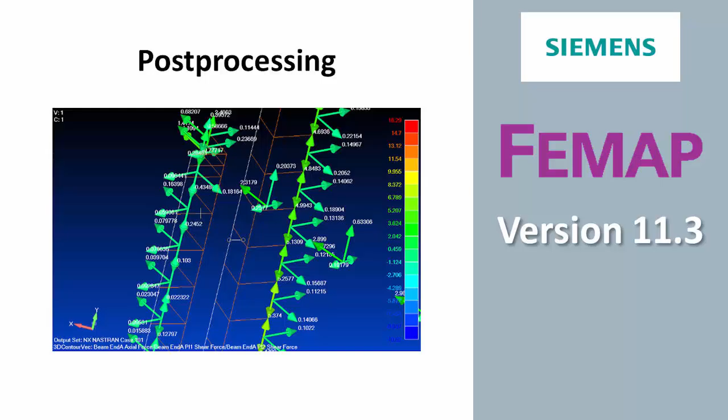Post-processing: we did a complete overhaul of what we used to call contour vector plots, which was confusing since we already had contour plots and data output vectors that really didn't have anything to do with each other. We're making arrows, so we now call them arrow plots.

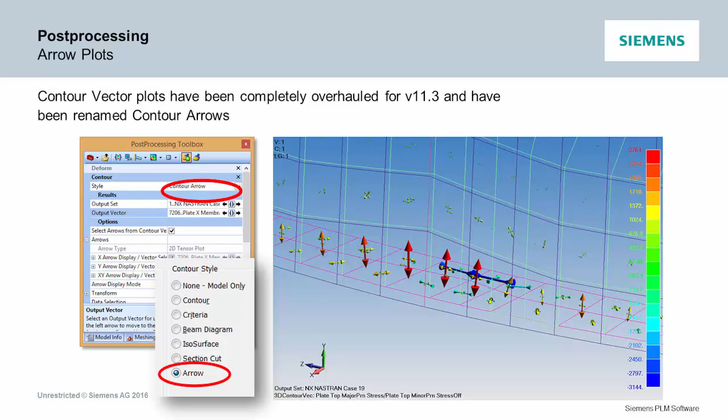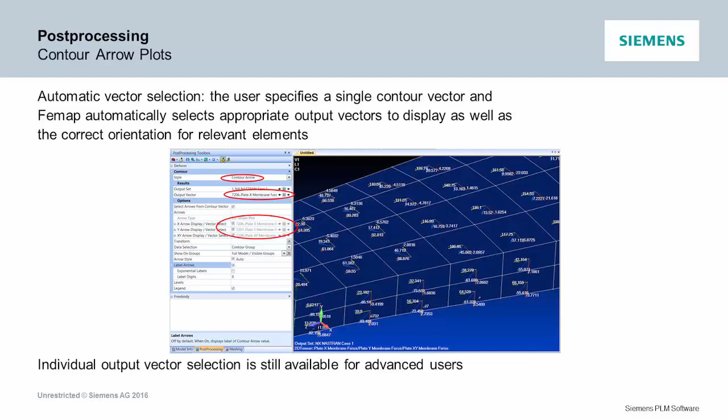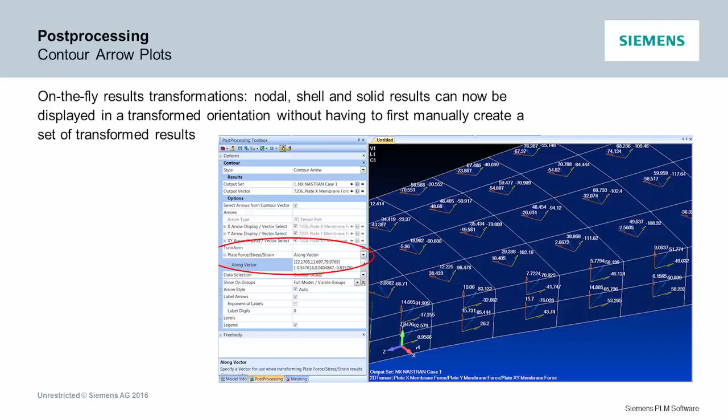We set this up so that when you pick something like membrane forces, picking X, Y, or shear automatically retrieves the other components and plots them all at once. You don't have to worry about it. If you then press the transform button, it just transforms them without you setting up a bunch of stuff. It's so easy now to make a force plot, transform it in any coordinate system, and see it on screen. It changes the arrows to something that makes sense.

It does the same thing if you're plotting principal stresses. It automatically switches to center arrows, shows tension and compression, and you can see what direction they are. If you pick major stresses, it automatically picks the minor stress too. But if you want to turn one of them off, you just turn it off and you'll see only the one.

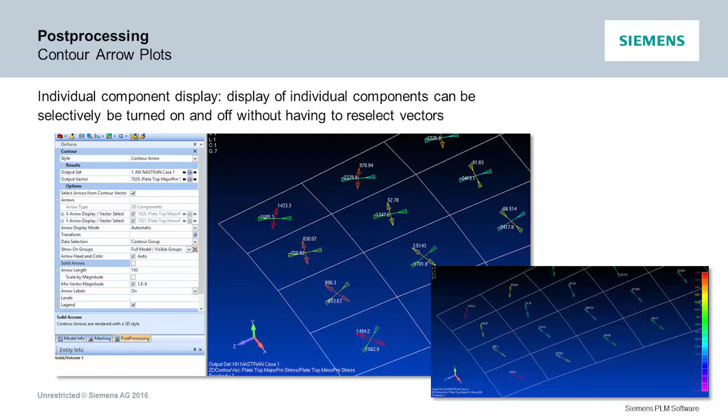There's also solid arrows if you want it to look pretty and nice, but those are optional, and they do look pretty nice. It kind of demos better than it shows here.

Let's do some beam examples real quick. I'm going to shut off everything but my beam elements in this model. This model has stiffeners running vertically, though you can barely see them, and fasteners running this way.

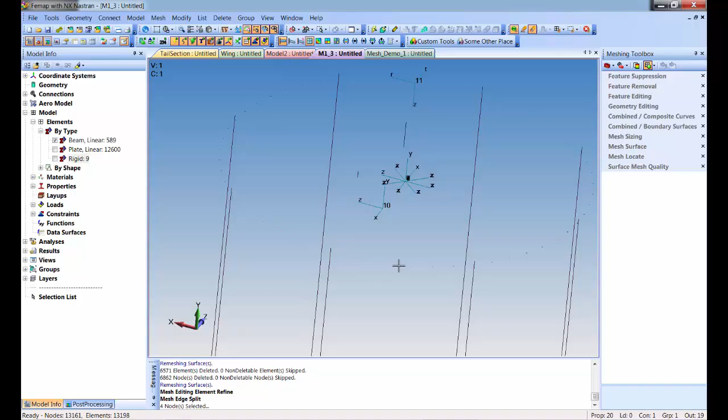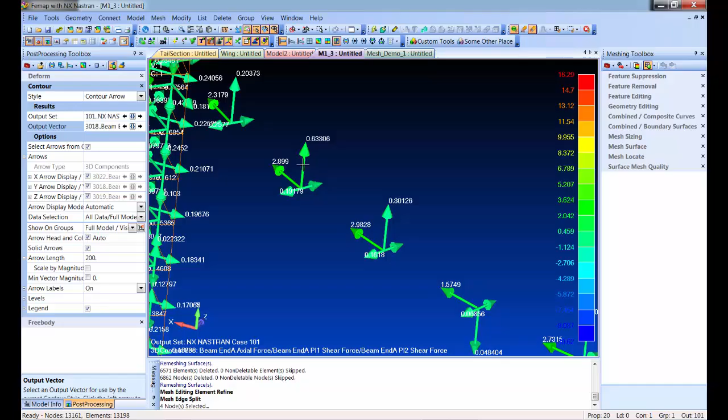So if I go into the arrow plot and pick shear force on a beam, it automatically draws all my beams. You'll see tension on that little fastener, here's its shear components, and the bigger one shows the same thing, tension and shear.

Another nice thing you can do here: I know that shear is YZ, and I can combine those at the same time into their total shear without having to do any output calculations.

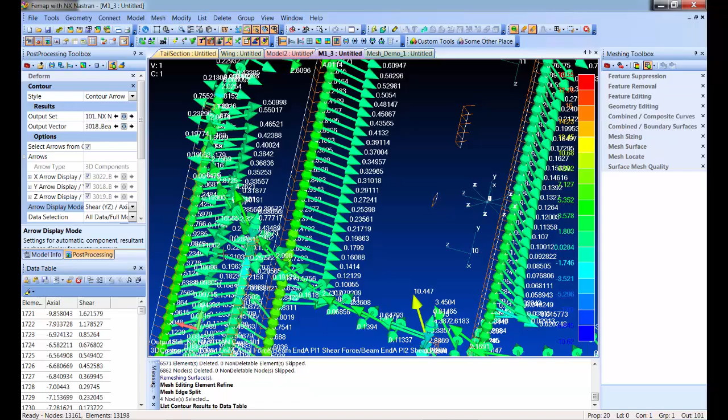Just like everything else in Femap, I'm going to turn on my data table and say list output contoured results to the data table, and now I can sort. If I turn on the highlighter and highlight something, it'll show me the highest axial stress or axial force in the model in this case.

Or if I change this to shear, I can find the highest shear value right here on this element. It shows me the element ID, and I can see the max shear. I can quickly tell what's the highest shear load in a fastener in this entire model.

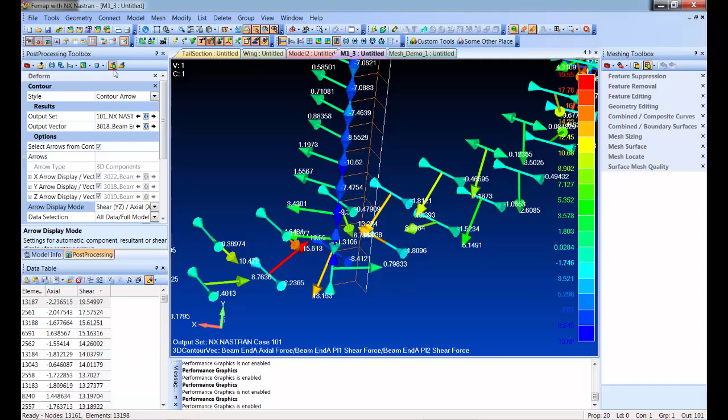I'm running in performance graphics right now, which is a little better because it can draw the symbols and the little arrows faster. That's all taken care of. A lot of things that we can't draw in performance graphics now internally fall through and draw with the old graphics, so you can pretty much stay in performance graphics all the time.

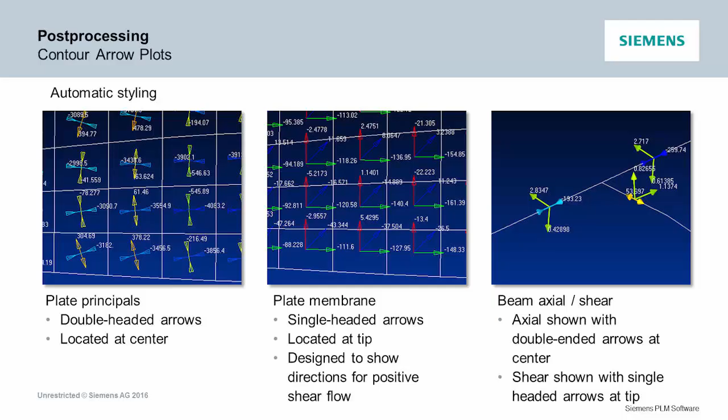You saw this work for beams, but it also works for bushings. So if you've got a bunch of CBUSH elements, you can now see the forces in the CBUSH at the same time. Even simple displacements draw with these new arrows, and then you can transform or do whatever you want, and use the listings, sorting, and all that.

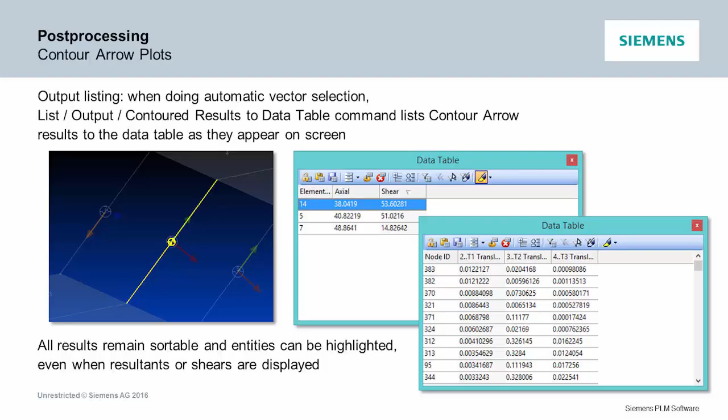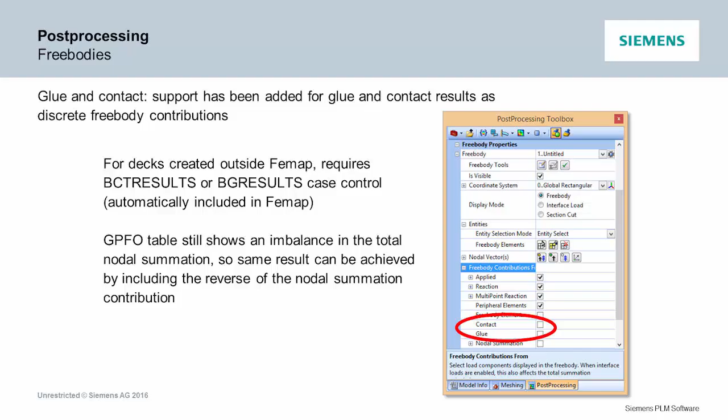Some free body enhancements: in Nastran there's been issues over the years where glue forces were backwards in the grid point force balance. Femap took care of it, recognizing it as backwards and flipping it so things were balanced. They've since fixed some of those, so now you don't need to turn them on and off and do any flipping. Things are squared up on free bodies.

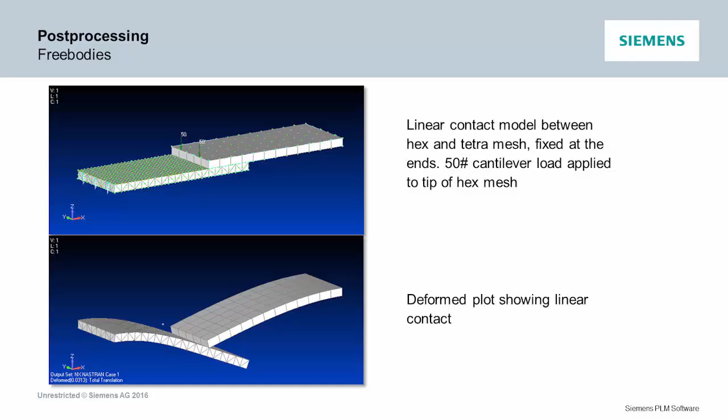Just with linear contact now, you get all the free body stuff in the Nastran results file, and you can see total forces across joints and whatever you want to do with free bodies.

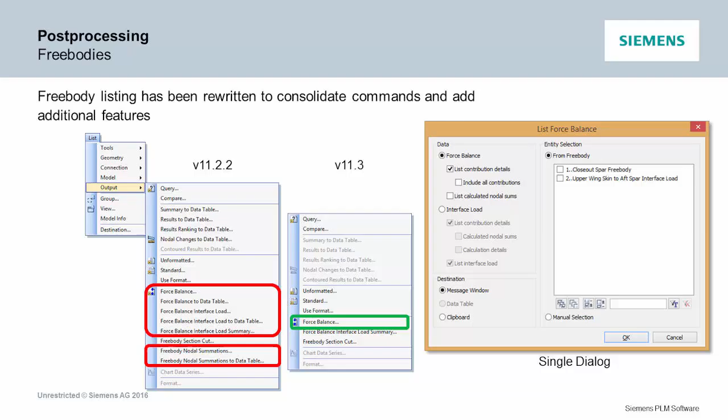Some new listing options: we've consolidated what used to be all these different commands into one nice box. You can just list your free body data much easier, and besides the window, it can automatically send it to the clipboard or the data table, which is nice when you're messing with free body forces.

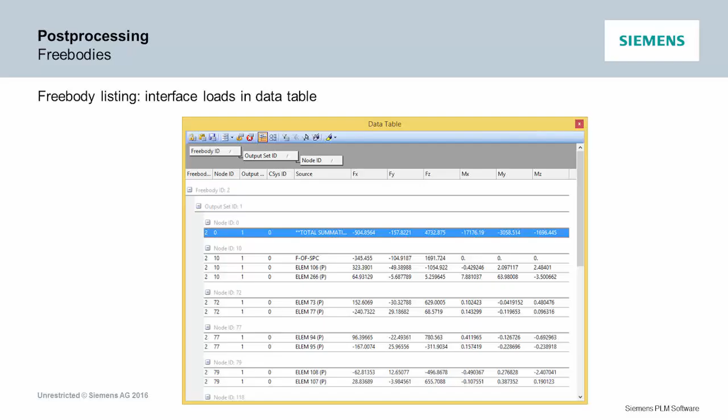The listing, when going to the data table, actually mimics the F06 file. So if anyone is used to looking at the Nastran printed results for free body information or grid point force balance, Femap will now spit out the same thing so you can cut and paste it.

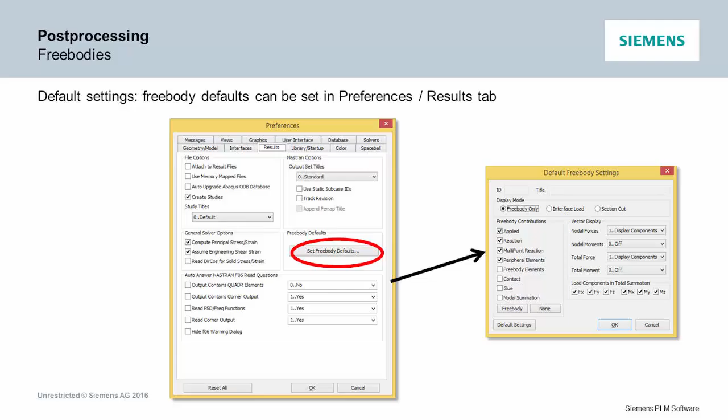For free bodies, there are some options when you set up any new free body. The defaults are usually right for just making a free body, but if you do something special, you can now set the default so each time you create a free body, it gets the settings you want.

A small usability enhancement: we've got charting in Femap, completely rewritten in 11.2. It's really nice, but previously if you had 1,000 transient output sets and wanted to plot acceleration of a node, you'd create a chart, create a data series, tell it what you wanted, go from 1 to 1,000, and then finally pick a node.

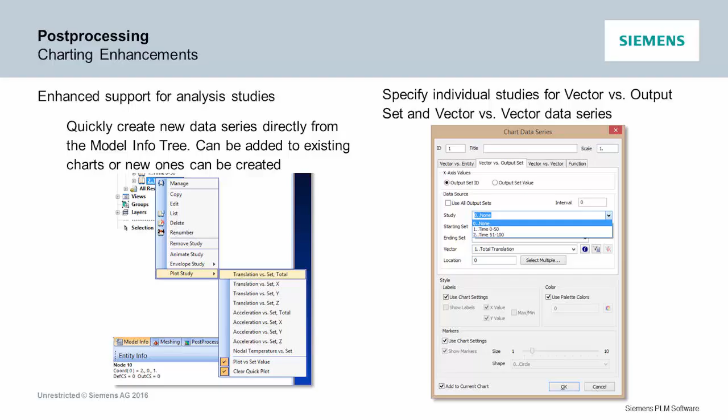Now, on the studies tree, you pick the transient study, right-click, and say you want to do a Z acceleration plot. It asks you for the node and makes the plot. You can pick 50 nodes, whatever you pick, and it makes it all in one instant shot. We added translations, accelerations, and temperatures, since for most people we thought that would be what they wanted to do.